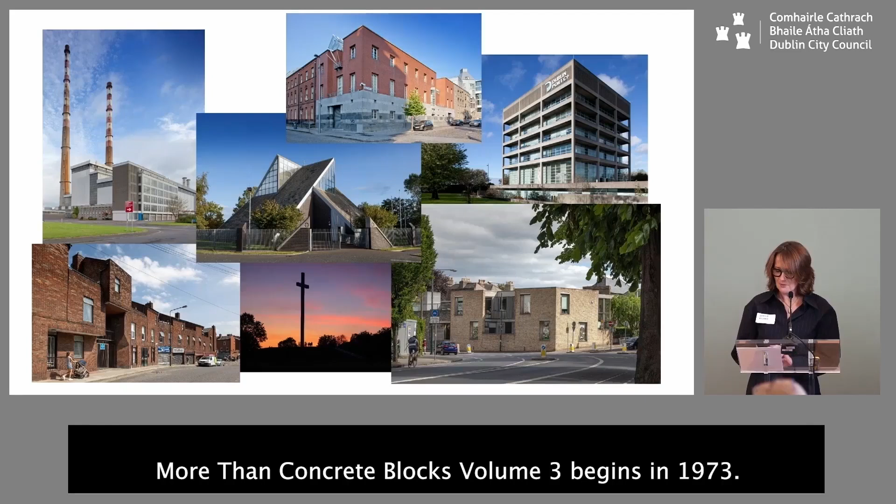More Than Concrete Blocks, Volume 3, begins in 1973. The book starts with 3 contextual essays, one for each of the decades - the 70s, 80s, and 90s - before setting the scene and allowing the reader to situate themselves in the city and imagine the conditions that gave birth to a wonderful, eclectic, and particularly Irish architecture.

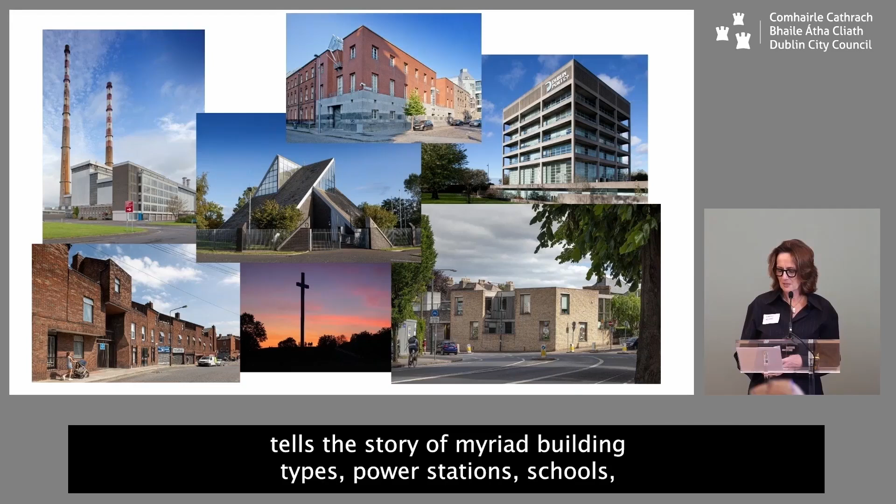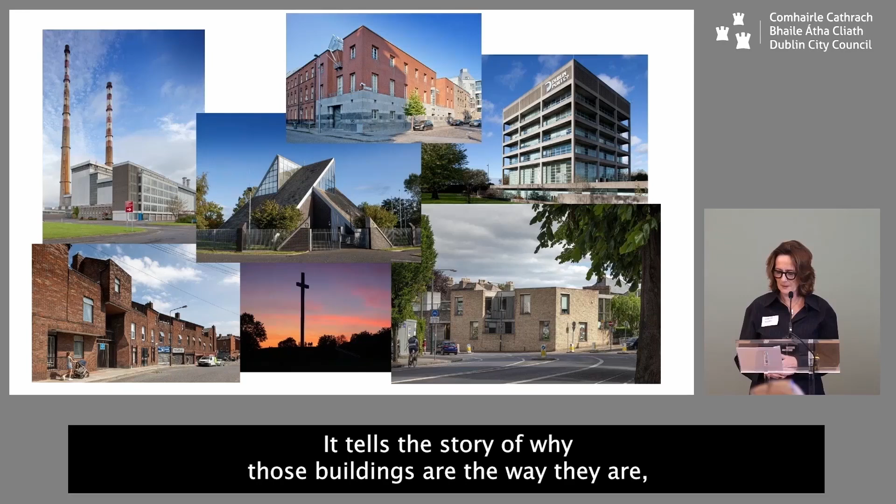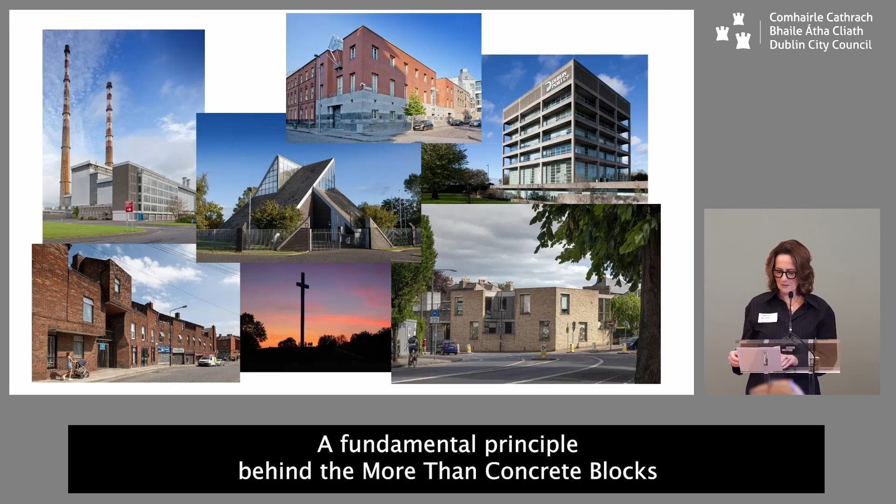That is the bread and butter of our city, the ordinary, everyday stage set of our lives. More Than Concrete Blocks tells the story of myriad building types: power stations, schools, healthcare buildings, housing, churches and courthouses, monuments and office blocks. It tells the story of why those buildings are the way they are, why they were built and by whom, and how they have served their owners and their communities in the years since they were built.

A fundamental principle behind the More Than Concrete Blocks project was the belief that knowing our building stock well, understanding its intricacies, and valuing it for what it tells us about ourselves is vital for a healthy and thriving city. Biodiversity is a word we understand and respect. We believe that cities need similar diversity - archidiversity, if you will - to remain healthy, vibrant, relevant, and sustainable. We need to pause and consider the loss of our archidiversity, particularly the significant loss of late 20th century office blocks, and imagine how our city can embrace that architecture and take it on the ride into the future.

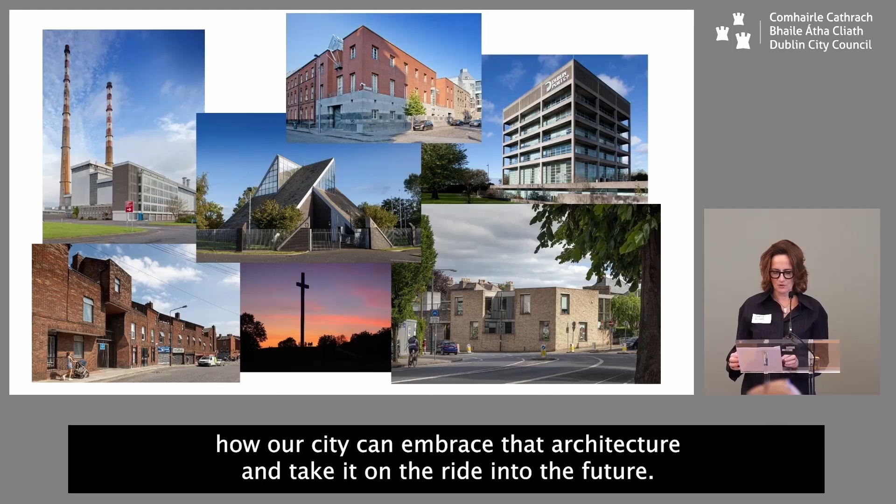In recent times, my regular cycling route has changed profoundly with the loss of 3 significant 20th century Dublin landmarks: Kevin Street College of Technology, Molyneux House, and River House. Ample evidence of the increasing incidence of loss of this particular 20th century varietal.

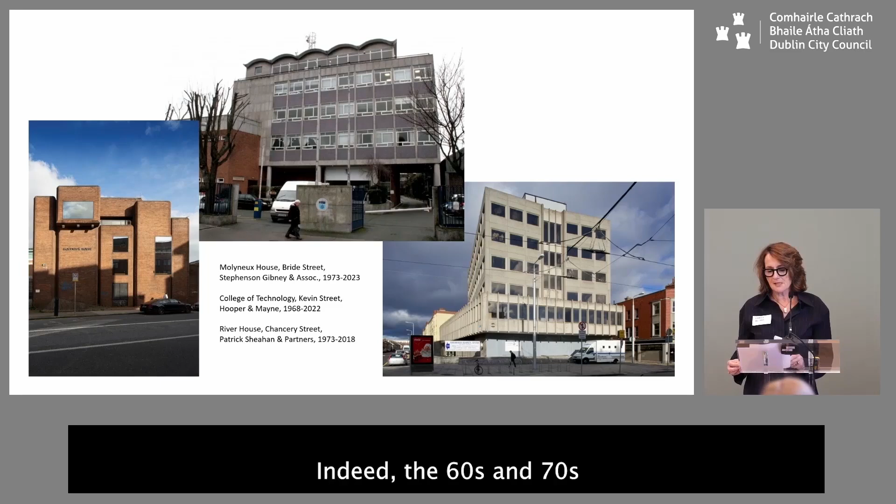Indeed, the 60s and 70s office block is a particularly vulnerable beast, with wholesale demolition occurring across the city. The scale of obliteration is feeding the debate about architectural value. What makes a building worth conserving or worthy of substantial retention by way of adaptive reuse?

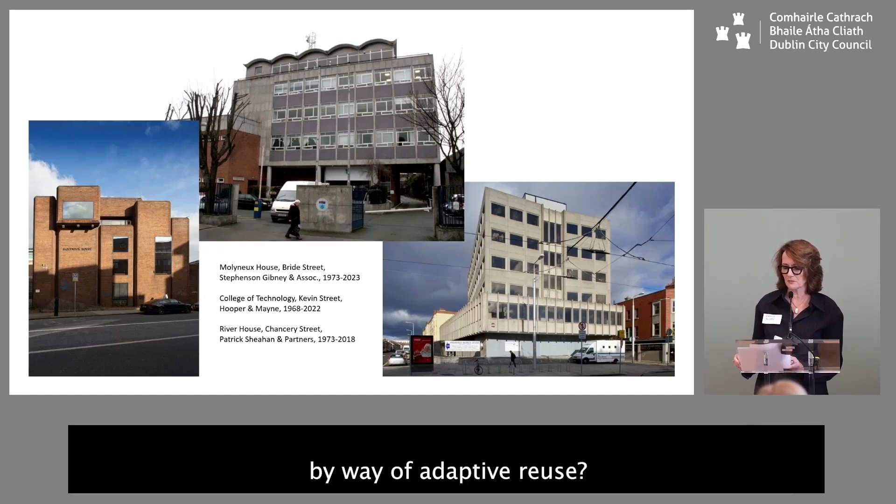Under planning legislation, local authorities are obliged to draw up a record of protected structures known as the RPS, which includes every structure which, in its opinion, is of special architectural, historical, archaeological, artistic, cultural, scientific, social, or technical interest. And I know everybody in this room is very familiar with that.

However, it is very rare to find late 20th century office blocks on the RPS. This factor, combined with the fact that 60s and 70s office blocks usually sit on very valuable city real estate, makes them particularly vulnerable to demolition.

There is no roadmap for the assessment of their value, and in any case, such assessment, if it is deemed necessary, falls to independent heritage specialists who earn their fees from the developers, whose primary objective, of course, is to derive maximum value from the building site. It makes sense then that the sites of the 70s office blocks are primary targets for redevelopment.

Nevertheless, there are a few 1970s office buildings listed on the RPS - the former Bank of Ireland headquarters on Baggot Street, now known as Miesian Plaza, being one. Its recent refurbishment by its original architect, Scott Tallon Walker, is an obvious exemplar to boost the position of planning authorities regarding refusing permission to demolish in favour of refurbishment.

The successful, albeit costly, refurbishment at Baggot Street can show the way for developers to see the value in such upgrades. Gains must be measured not just in terms of financial return, but in the longer-term environmental benefits of sustainable development and, of course, the preservation of our archidiversity.

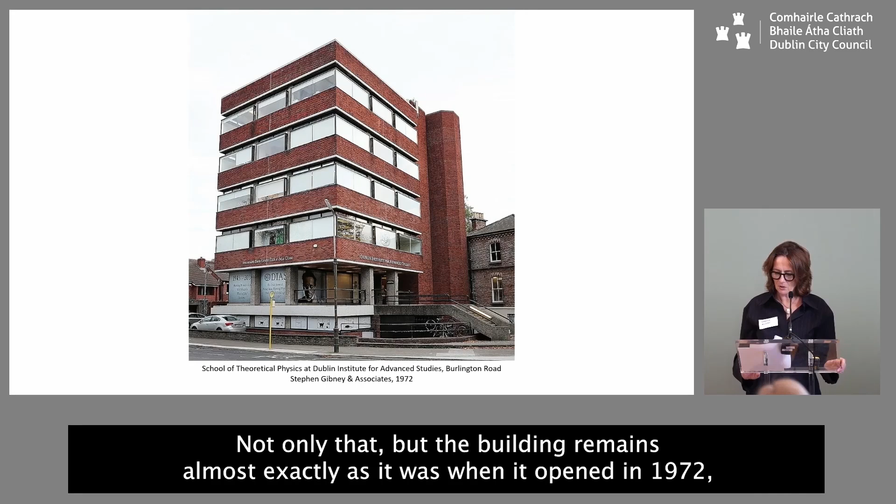Another lesser-known office building on the RPS is the School of Theoretical Physics at the Dublin Institute for Advanced Studies on Burlington Road, designed by Stephen Gibney and Associates. Despite many lucrative offers from developers to purchase the site, the DIAS, who is the owner-occupier, has held firm. Not only that, but the building remains almost exactly as it was when it opened in 1972, complete with original furniture, library shelves, light fittings, and the most precious fixtures of all - the blackboards.

The former New Ireland Assurance Company offices on Dawson Street is another example of an office building on the RPS, currently undergoing refurbishment and extension while retaining substantially its original form. The building is in fact an amalgam of three buildings: a 1934 office building on Dawson Lane by Vincent Kelly, a 1964 office building on the corner of Dawson Street and Dawson Lane by Morris and McCullough, and a 1971 building on Dawson Street by Patrick Campbell.

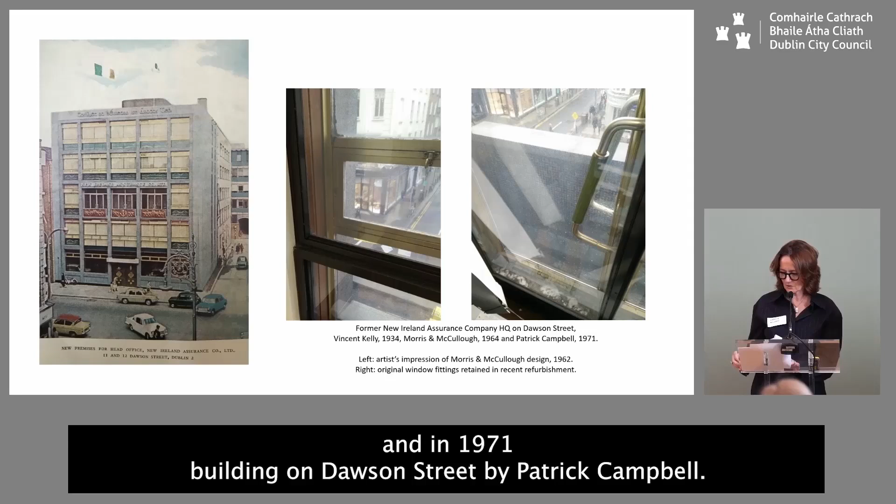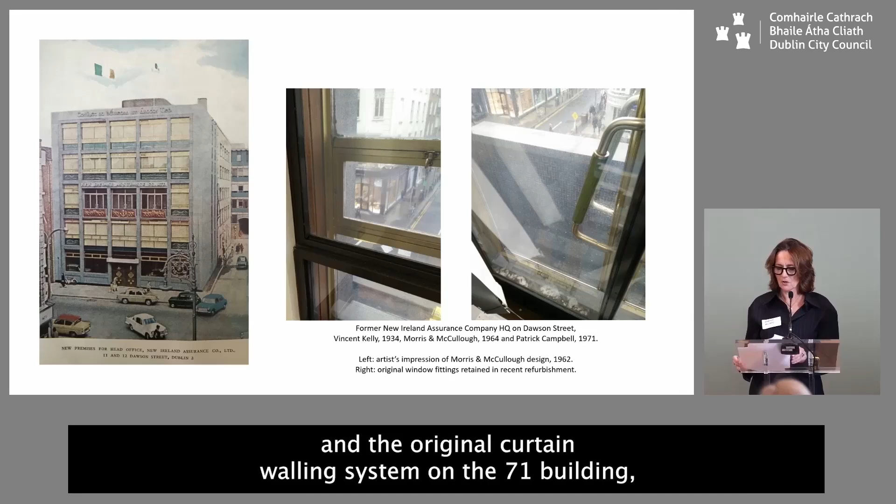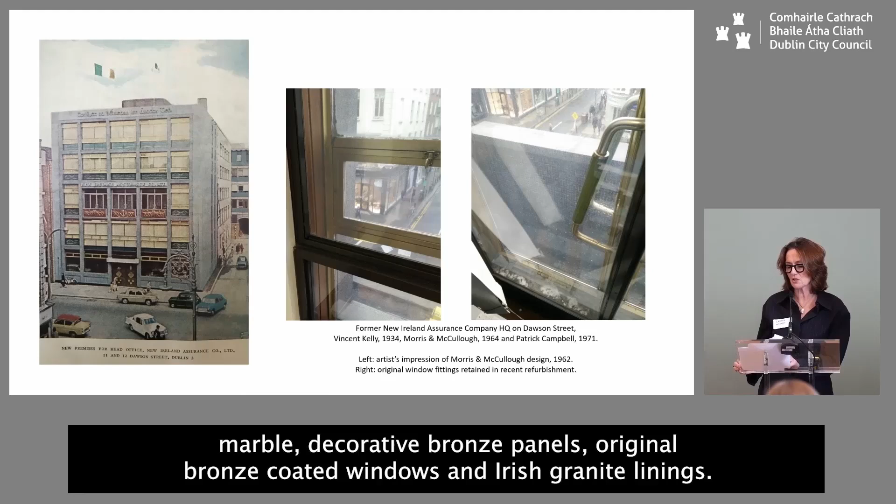The current refurbishment works, which are nearing completion, include the retention of the concrete structure and facades, and the original curtain walling system on the '71 building. They also include many of the building's unique and important details, including Connemara marble, decorative bronze panels, original bronze-coated windows, and Irish granite linings. Planners granted permission for additional floors set back behind the parapet, showing compromise can reap benefits for all.

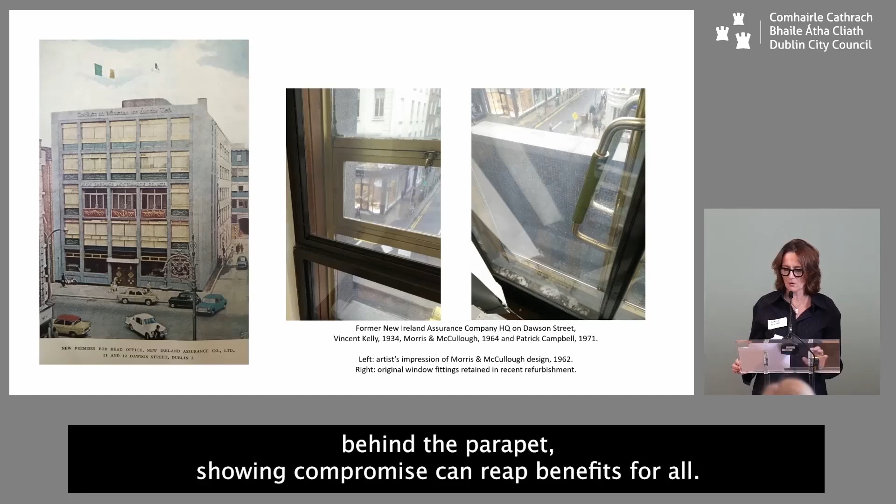In the context of the pervasive threat to Dublin's 1970s office blocks, these three projects represent gains, each in a different way. Unfortunately, though, the survival of office buildings like these, the gains, are greatly outnumbered by the losses.

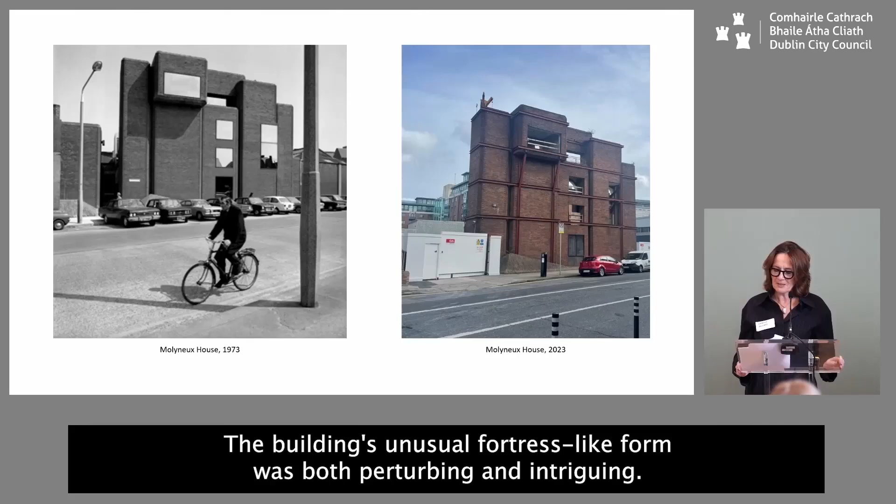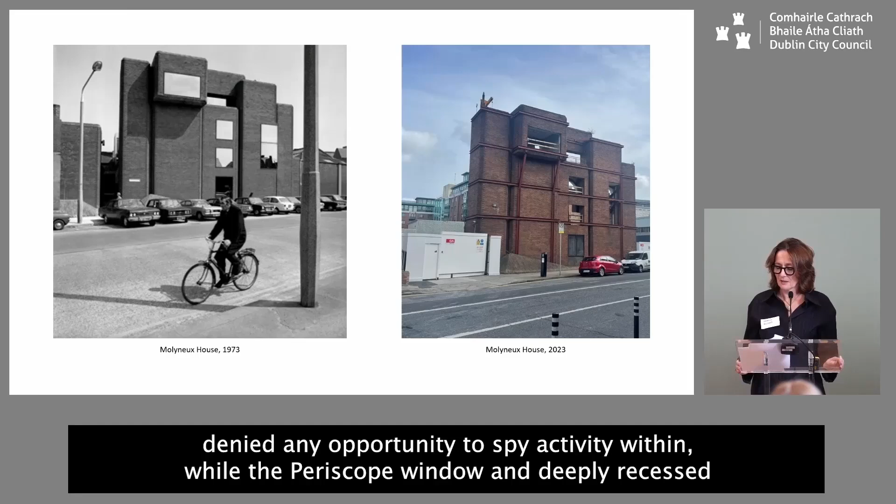Until earlier this year, the facade of Molyneux House remained one of the most distinctive in the city. The building's unusual fortress-like form was both perturbing and intriguing. Reflective glass in the windows, now gone, denied any opportunity to spy activity within, while the periscope window and deeply recessed balcony on the fourth floor suggested covert surveillance of the street below.

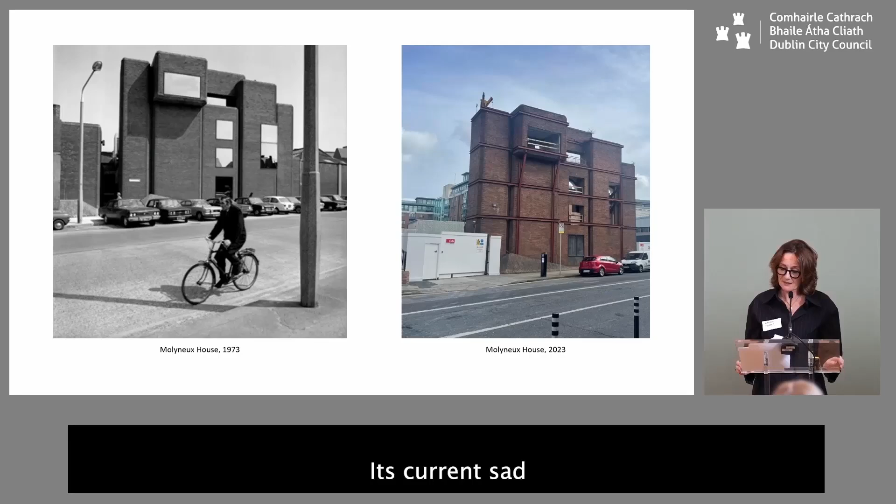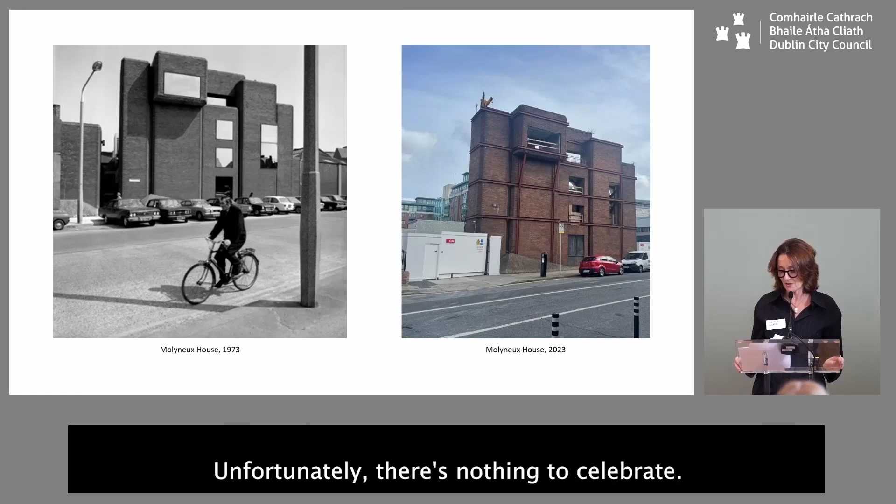In its current sad state, it is all the more distressing for the fact that Molyneux House is celebrating its 50th birthday this year. Unfortunately, there's nothing to celebrate. All that remains is the skeletal outer layer of its remarkable facade.

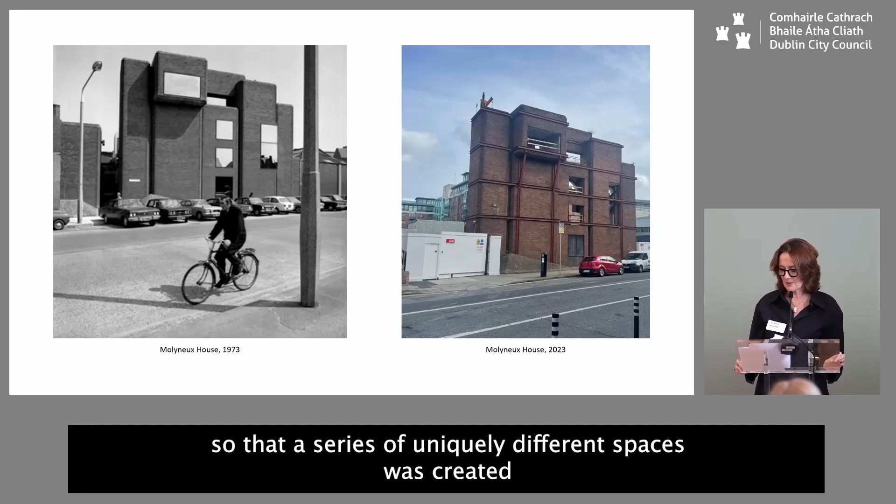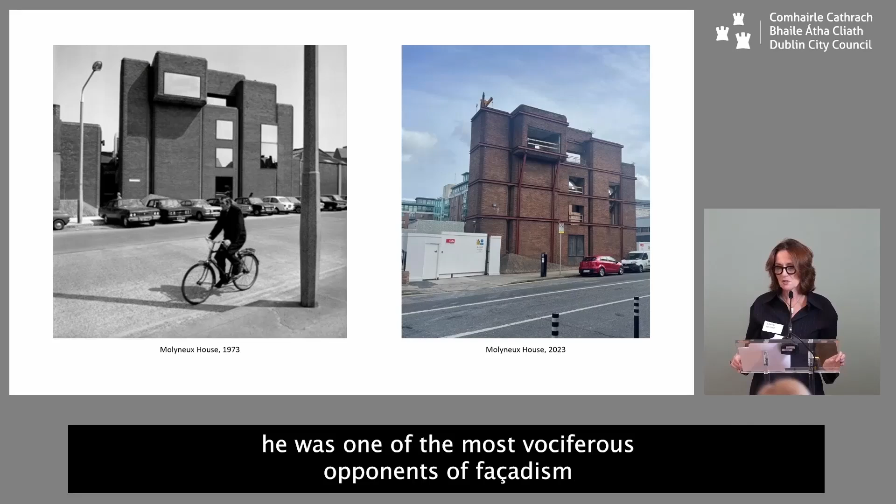In designing that facade, Stephenson purposely retained the front wall of the original 19th century Molyneux Chapel, constructing an outer layer that broke forward from the old in an irregular manner, so that a series of uniquely different spaces was created between the old and the new skins. By retaining the outer brick layer only, now in 2023, Stephenson's ingenious gesture is completely lost. A tragic irony, considering he was one of the most vociferous opponents of facadism in the 1970s and 80s.

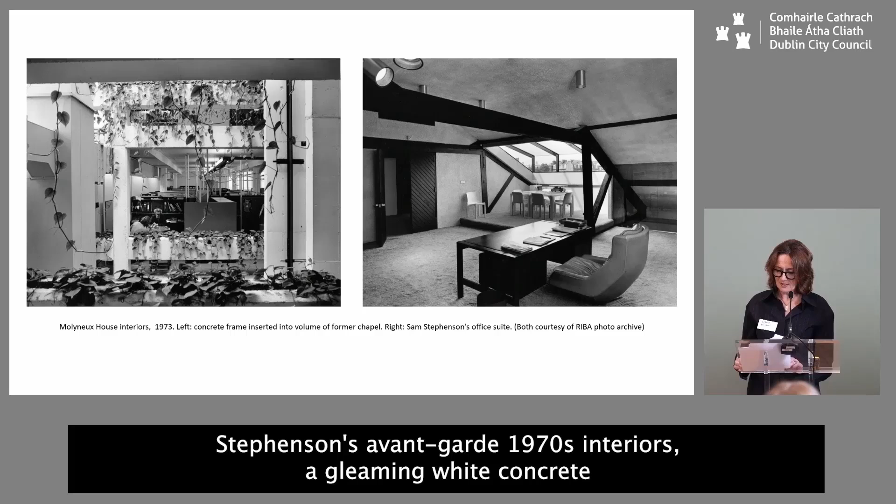What has been lost at Molyneux House is significant and regrettable, but it began long before the wrecking balls came in 2023. Stephenson's avant-garde 1970s interiors, a gleaming white concrete frame inserted into the volume of the former church, with open-plan offices, a glass lift, an open staircase, trailing plants, and his own bespoke suite on the upper floor were gradually lost during the 1980s and 1990s. When a building is not on the record of protected structures, its interiors are particularly vulnerable to loss.

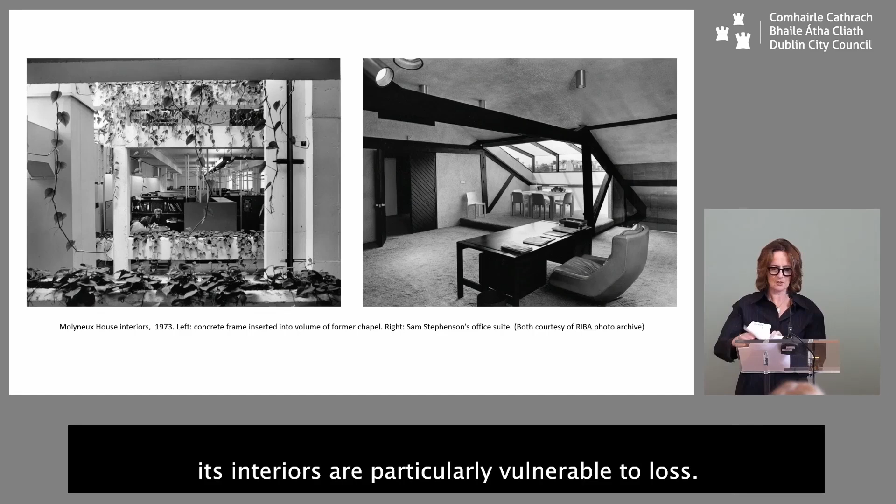AIB Bank Centre in Ballsbridge was not on the record of protected structures when permission to demolish the complex was granted in 2017. Bank Centre was designed and built as Ireland's first corporate campus, an American typology that became increasingly popular in Europe in the 1960s. The original scheme, designed by Andy Devane, comprised 15 pavilions arranged in a symmetrical composition, 9 of which were built. In 2018, when demolition began, the pavilions were in excellent condition, internally and externally.

They were nevertheless perceived by their developer to be redundant, worthless artifacts of an earlier age, and because there was no official measurement of value, there was nothing the planning authorities could do to prevent redevelopment. Devane's masterpiece, and I do not think it's an overstatement to call it that, was demolished and replaced with a new scheme called Fibonacci Square.

The scheme's developers chose the name because, they alleged, the renowned architect Andy Devane, designer of the AIB campus, was inspired by the Fibonacci sequence, as was his mentor, Frank Lloyd Wright. Having studied Devane's work for a number of years now, including his time under the tutelage of Frank Lloyd Wright, I have never come across a reference to Fibonacci in their work. A strange and obscure gesture in the circumstances.

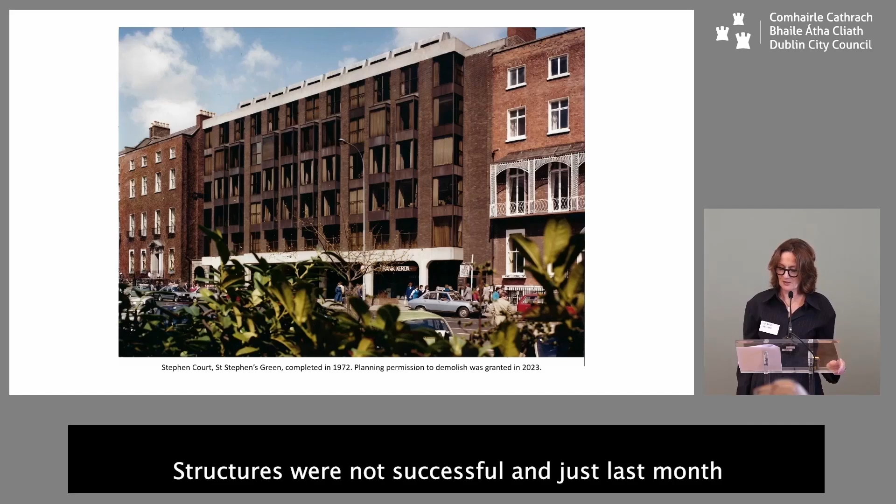Devane, one of the century's most prolific architects, designed only 3 office schemes in Dublin: AIB Bank Centre, the Irish Life Centre, and Stephen Court. Efforts to get Stephen Court listed on the record of protected structures were not successful. And just last month, an appeal to An Bord Pleanála was withdrawn, paving the way for its imminent demolition.

In the many submissions to the Planning Authority arguing against the demolition of Stephen Court, observers quite rightly pointed out that demolishing an office building to rebuild an office building was an outrageous proposal in 2022, given the climate emergency and the role and impact construction is playing on the climate crisis.

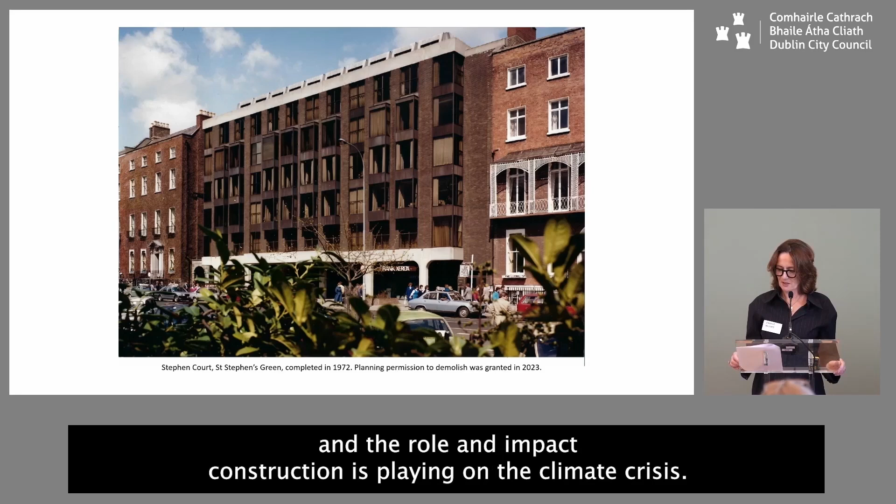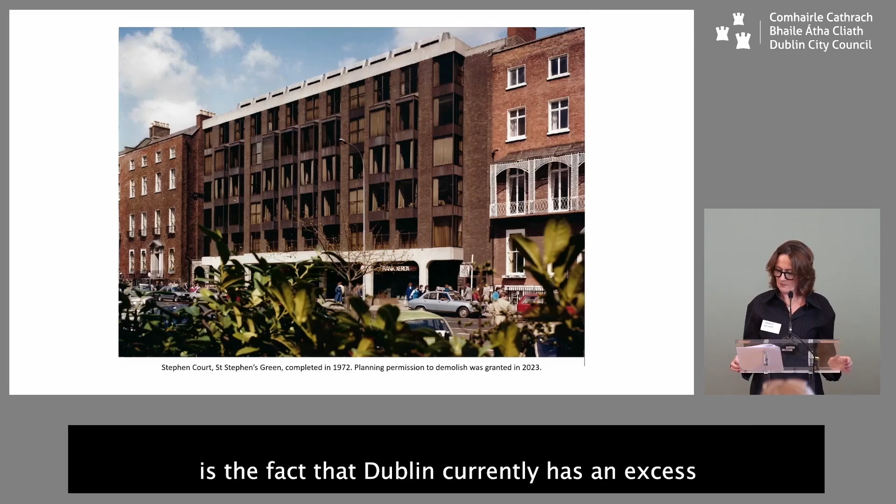This argument needs to gain more momentum. In the meantime, the only thing that may put a stay on the demolition of Stephen Court, long enough for its demolition to be reconsidered at least, is the fact that Dublin currently has an excess availability of office space.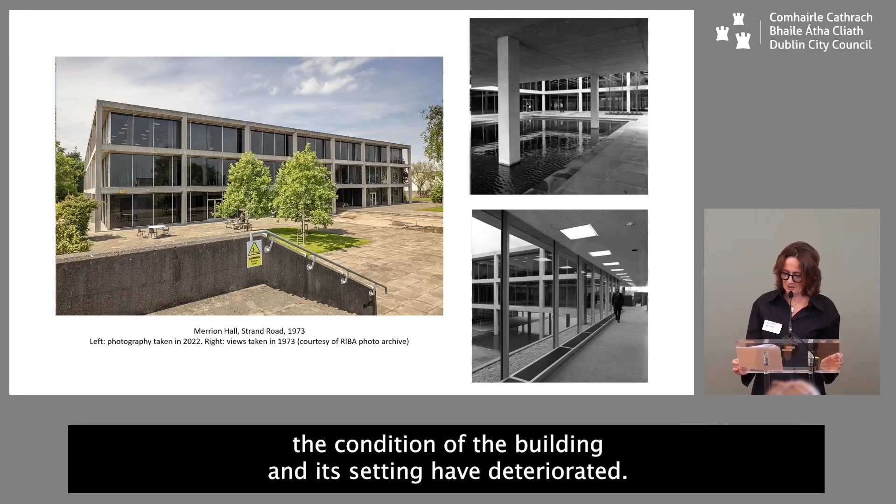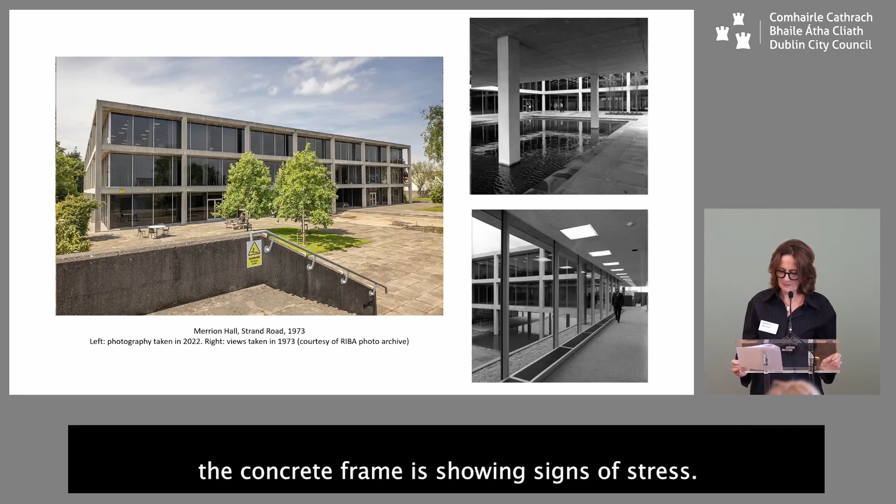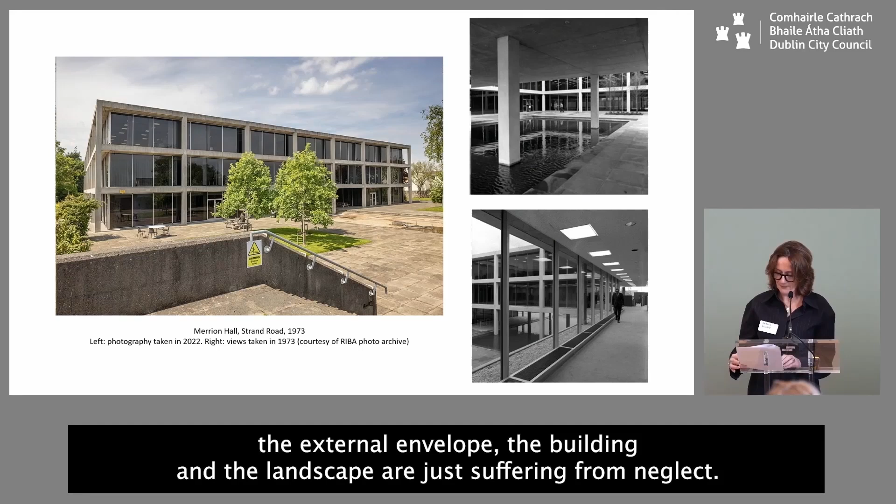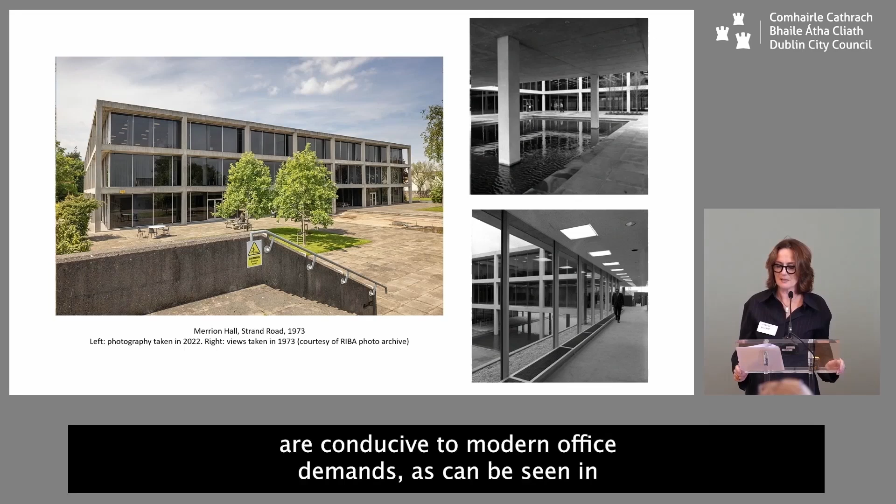The proportions of the office spaces are conducive to modern office demands, as can be seen in the interior photographs taken shortly after its completion. It is one of the most enduring Irish office blocks of its age.

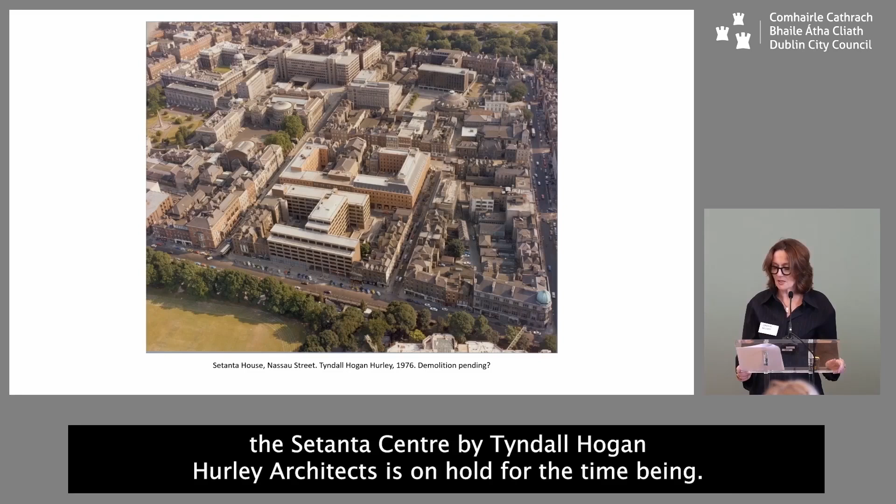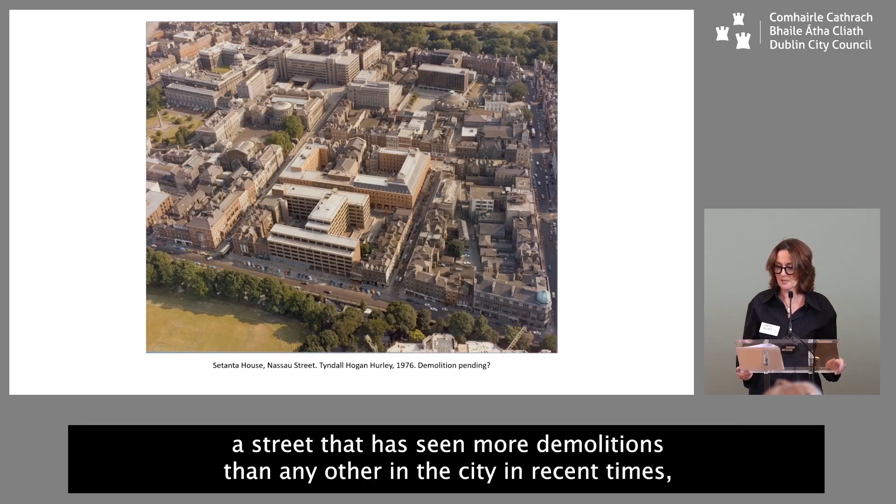Demolition of the Setanta Centre by Tyndall Hogan Hurley Architects is on hold for the time being. The decision not to proceed is not based on architectural or environmental considerations, but it is the result of a legal dispute between the developer and existing tenants. This photograph clearly shows the proximity of the Setanta Centre to Molesworth Street, a street that has seen more demolitions than any other in the city in recent times, and that phenomenon has spread into neighbouring Dawson Street and Nassau Street.

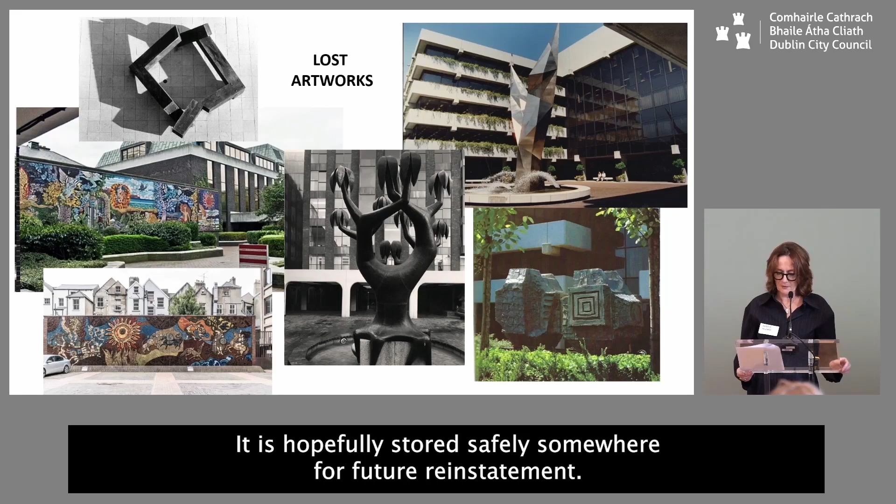While the fate of Setanta House is being decided, the famous 1970 Táin Wall, created by artist Desmond Kinney, was taken down. It is hopefully stored safely somewhere for future reinstatement. You can see it there on the bottom left. The same cannot be guaranteed for Kinney's other great 1987 mural, known as Sweeney Astray, shown middle left. According to one source, the mural was ripped off the wall of the Abbey Court Garden in the Irish Life Centre and packed into black plastic bags.

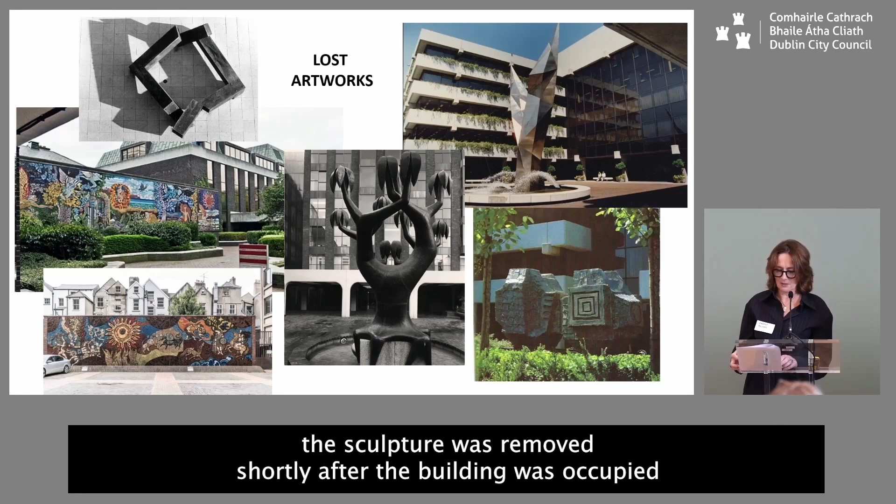Top left is an image of Michael Warren's timber sculpture, Noce Obscura, commissioned by architect Niall Scott for the Port and Docks headquarters on Alexandra Road. Intended to be viewed from the office floors above, as it is in this photograph, the sculpture was removed shortly after the building was occupied, and its whereabouts are unknown.

In the centre is a photograph of Imogen Stuart's Tree of Life, cast in copper, which stood in the internal courtyard of Stephen Court. It was one of a pair of Stuart sculptures commissioned by Devan. The other, the Tree of Knowledge, was cast in concrete. Both were removed in the 1980s, and their whereabouts are unknown. At bottom right is a photograph of John Behan's stone carvings known as Megalithic Monuments, which stood in the landscape gardens at AIB Bank Centre. The whereabouts of this artwork and others commissioned by Devan for AIB, including work by Desmond Kinney, Alexandra Wejchert and Anne Price Owens, are unknown.

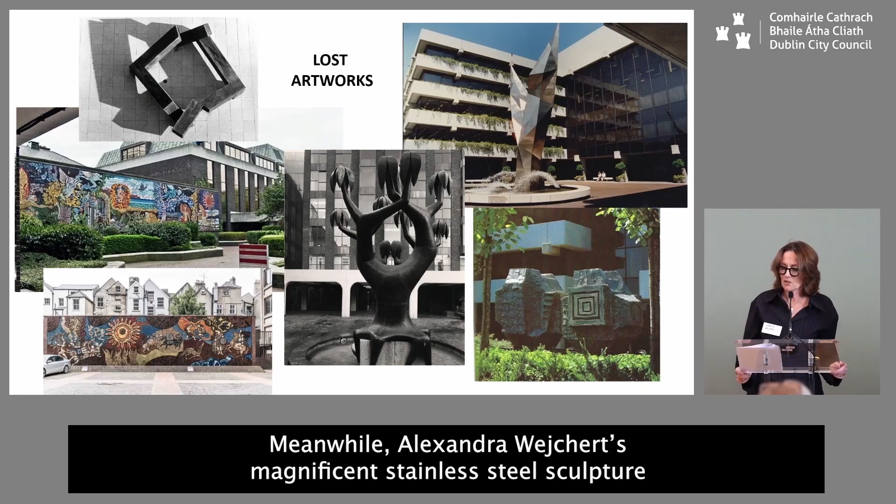Meanwhile, Alexandra Wejchert's magnificent stainless steel sculpture Freedom, shown on top right, was removed when Bank Centre was demolished and has been relocated to Maynooth University, I believe.

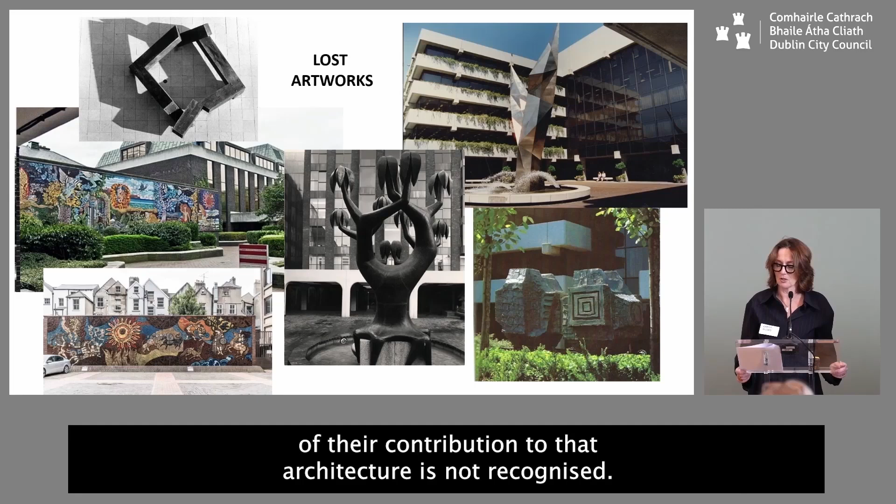Artworks were very much an integral part of 1970s architecture, but their value and the importance of their contribution to that architecture is not recognised. Like the buildings for which they were specially designed, they have no protection. Their vulnerability is exacerbated by the fact that the removal is not considered demolition and therefore does not require planning permission.

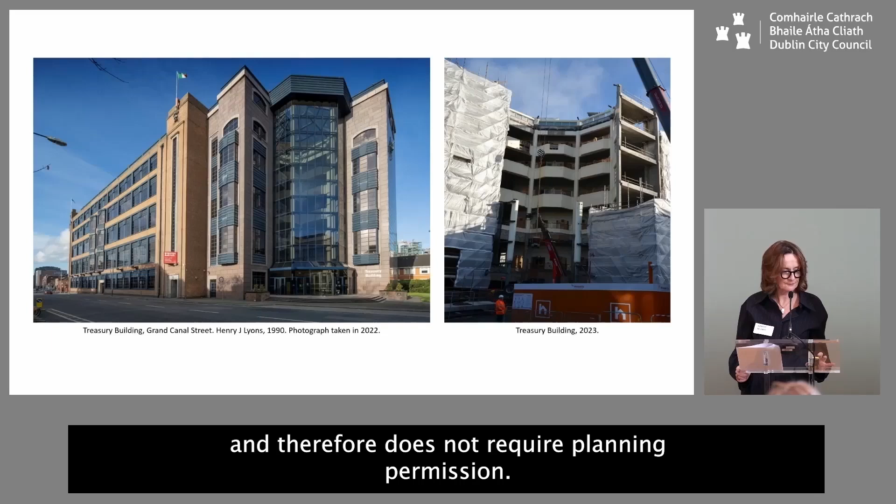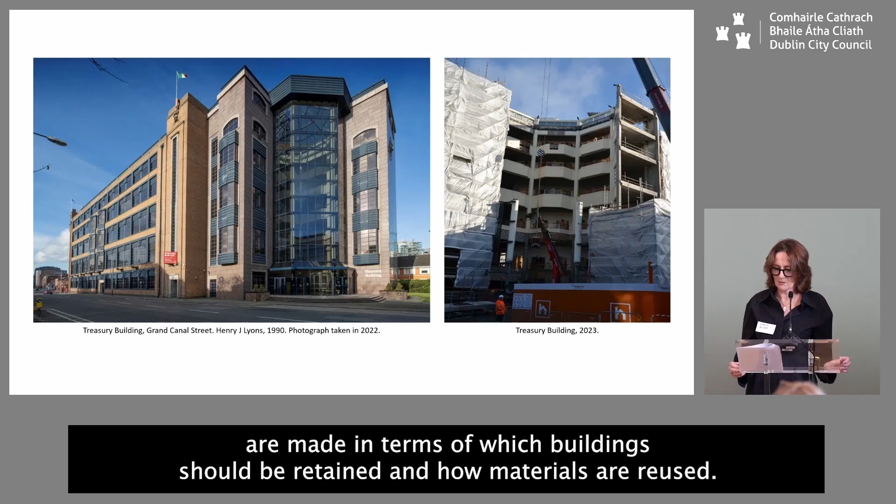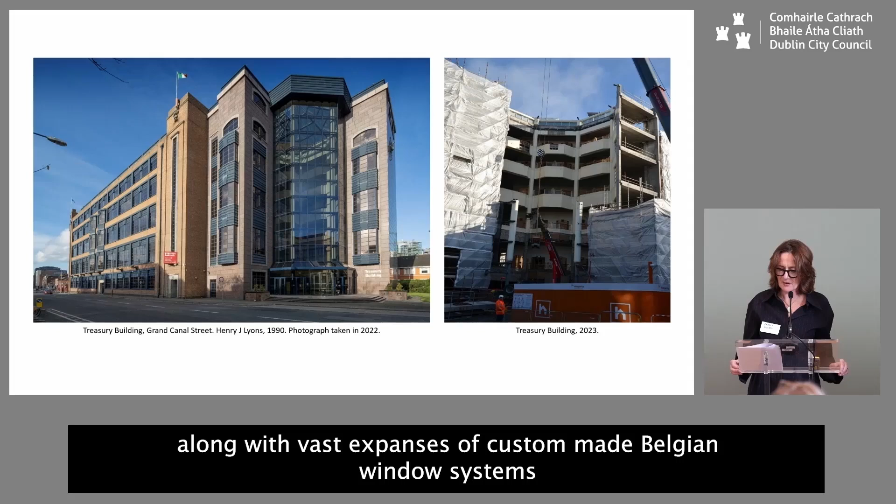Demolitions are continuing elsewhere in the city too, and while few will lament the loss of Hawkins House and others in that particular city block, the iterative dismantling and dumping of so many thousands of cubic metres of viable building materials must call into question how value assessments are made in terms of which buildings should be retained and how materials are reused. In the past few weeks, six stories of Italian and Norwegian marble, along with vast expanses of custom-made Belgian window systems, have been stripped off Treasury Building on Grand Canal Street.

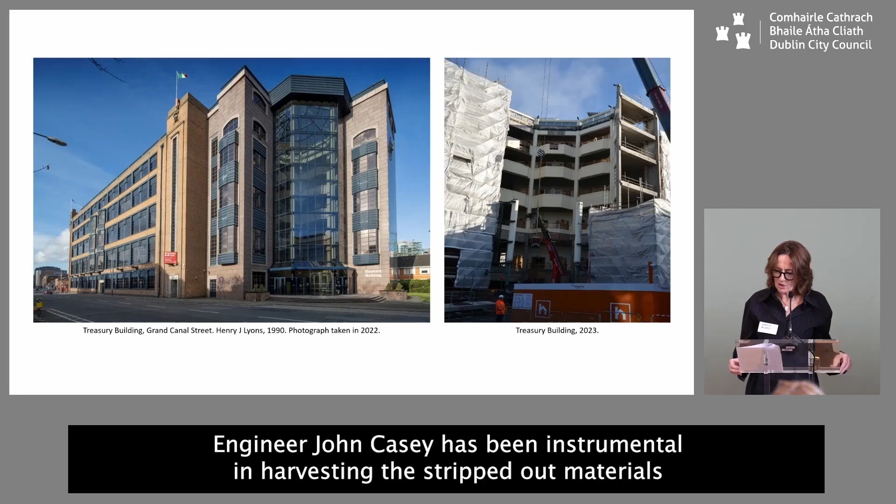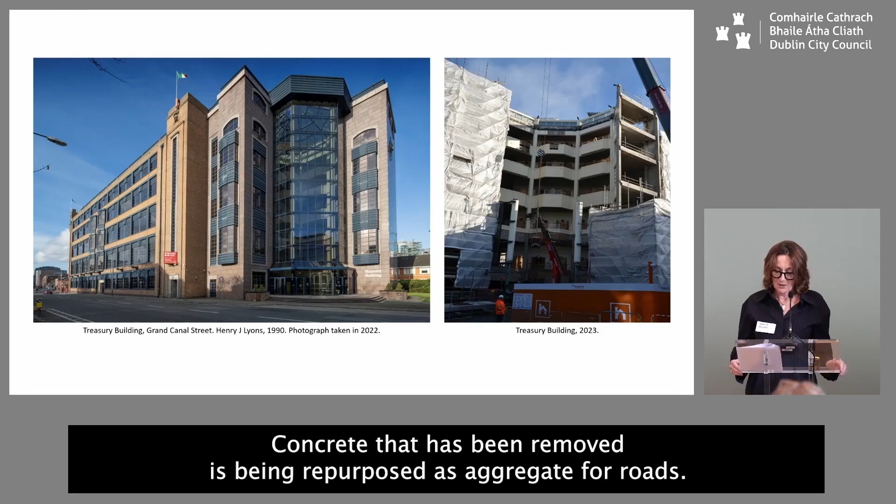There are little sparks of hope, though. Engineer John Casey has been instrumental in harvesting the stripped-out materials and in repurposing materials such as steelwork from the atrium in new parts of the building. Concrete that has been removed is being repurposed as aggregate for roads. But all that pink marble, specially selected by the developer in the 1980s, is available free to anyone who would like to take it away.

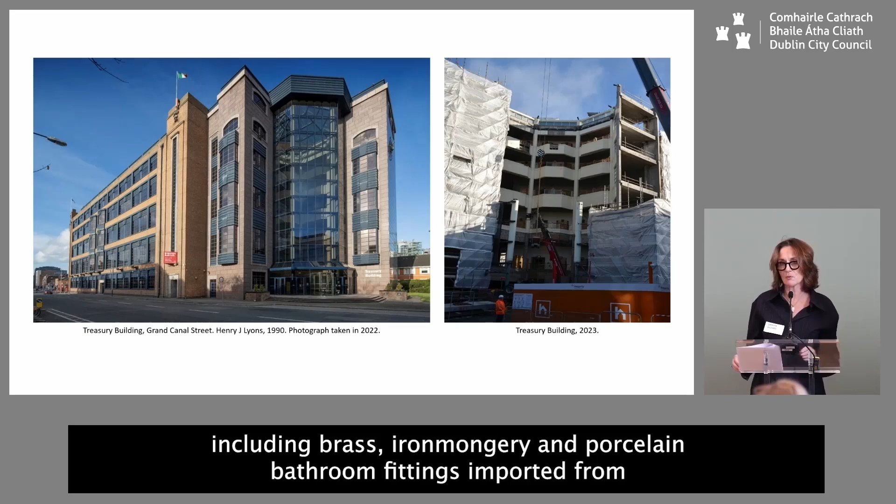If you are interested, you can check out the Irish Green Building Council website. No doubt other expensive bespoke interior fittings, including brass ironmongery and porcelain bathroom fittings imported from the United States, have been relegated to the dumpster.

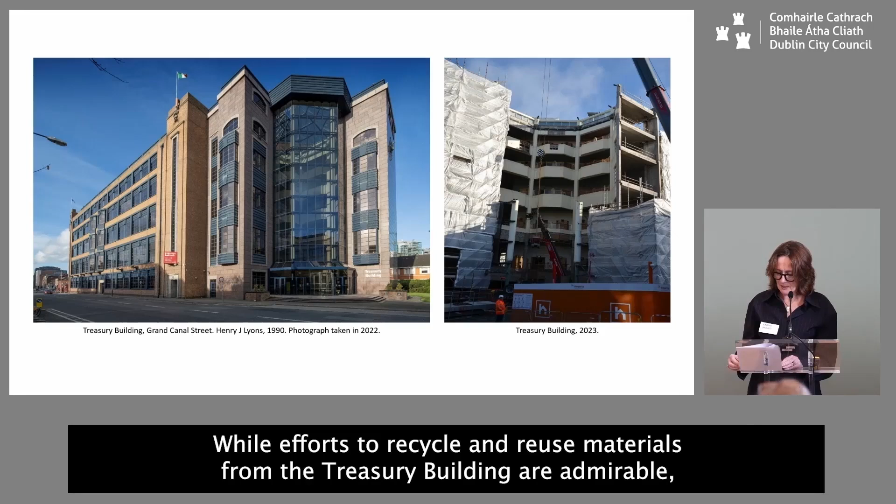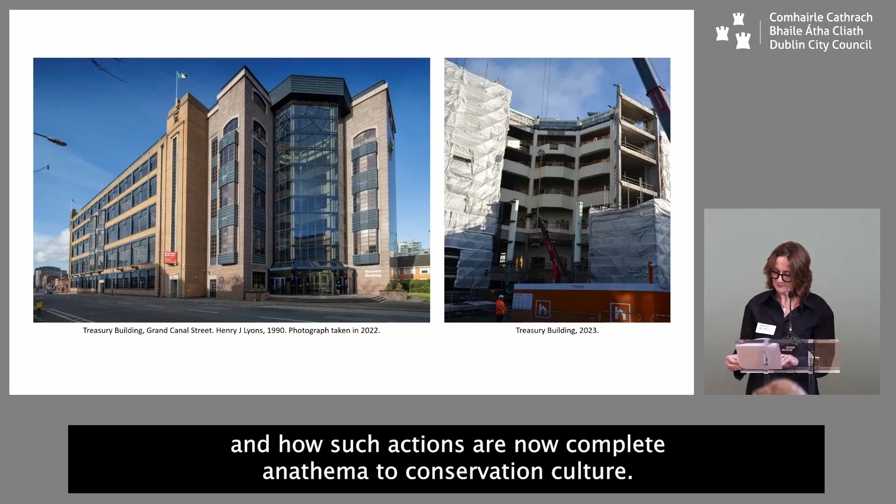And remember, this building was only completed in 1990. While efforts to recycle and reuse materials from the Treasury building are admirable, one cannot help drawing comparison with the removal of chimney breasts and the stripping of roof slates from historic buildings, and how such actions are now complete anathema to conservation culture. The groundbreaking work of John Casey and his team is important nonetheless, and it would be great if he could be commissioned by the Department of Heritage or the Department of Environment to report on the outcome of his efforts at Treasury Building.

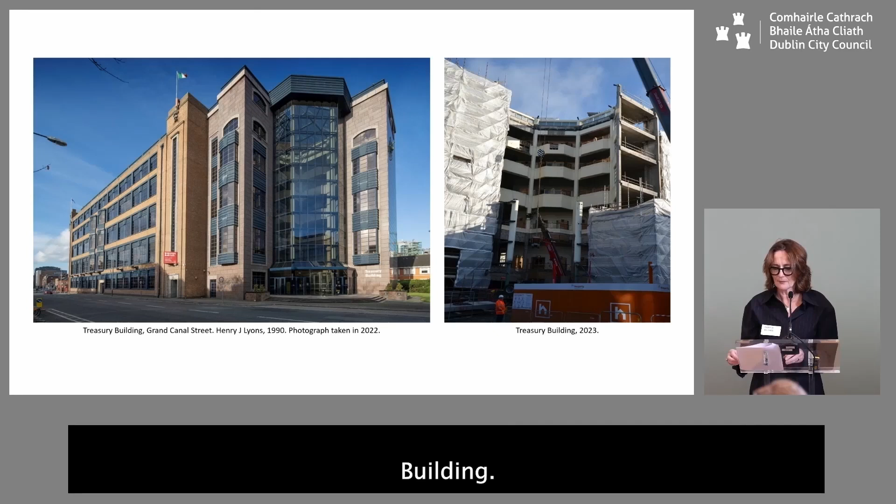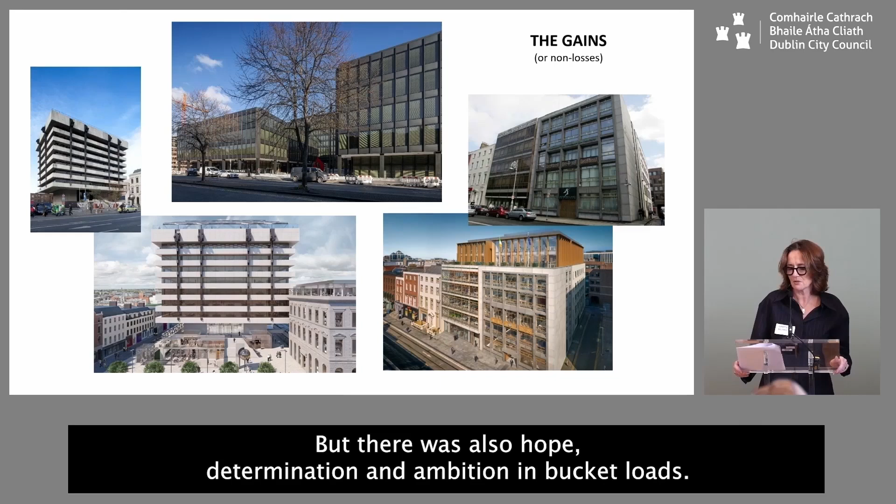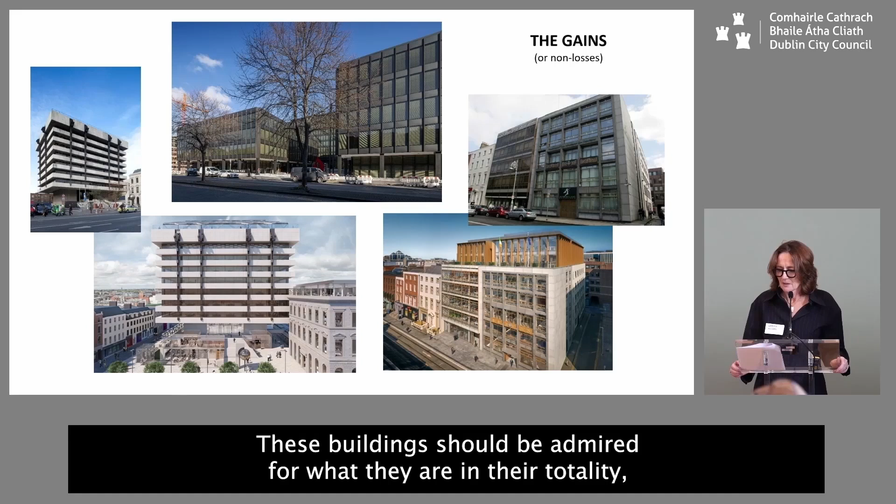1970s office buildings are troublesome, yes. There was inappropriate development, yes. There was poor quality construction, yes. But there was also hope, determination, and ambition in bucket loads. The decades of the 1960s and 1970s epitomise Ireland's concerted effort to declare itself an independent state. These buildings should be admired for what they are in their totality, not simply dismissed as irrelevant artefacts.

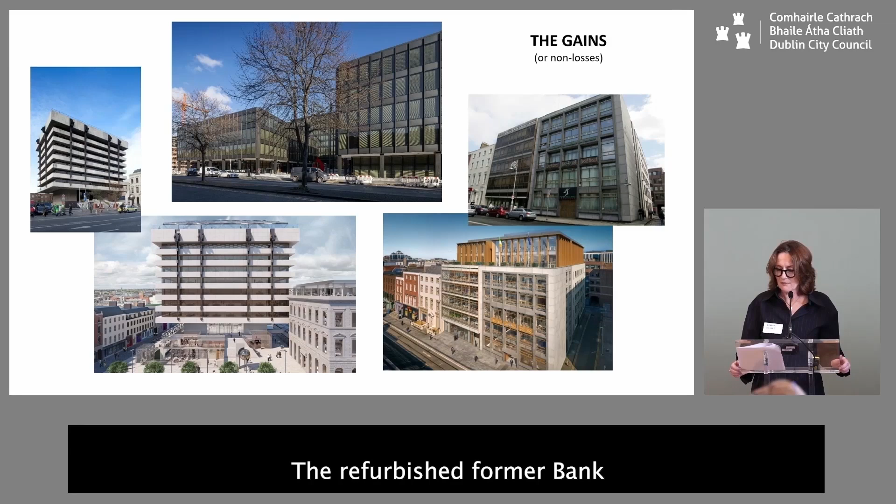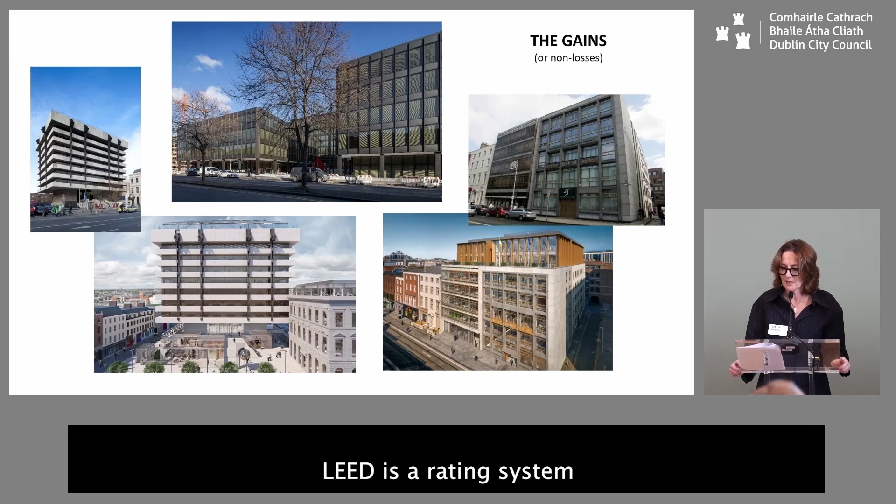The refurbished former Bank of Ireland headquarters on Baggot Street is one of the few listed buildings in Ireland to achieve Leadership in Energy and Environmental Design, LEED. LEED is a rating system devised by the United States Green Building Council. It measures the environmental performance and sustainability of buildings and goes above and beyond Irish regulatory standards in energy efficiency. I look forward to Ronan Phelan's presentation this afternoon.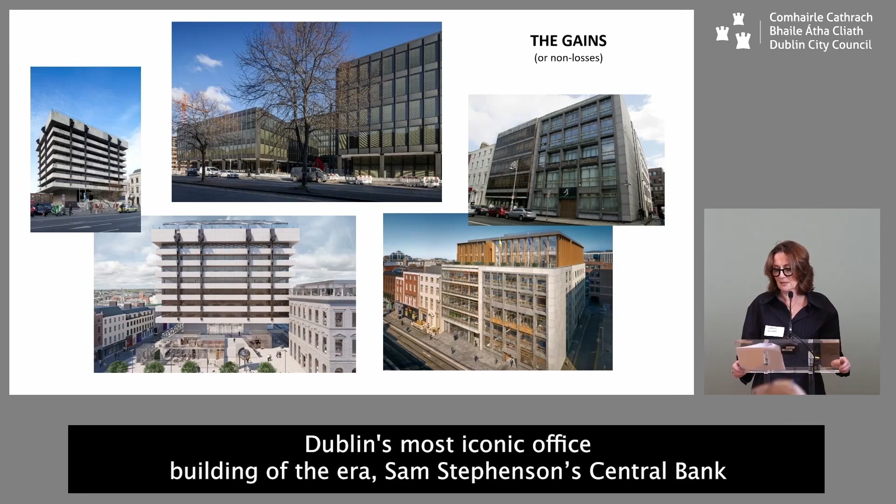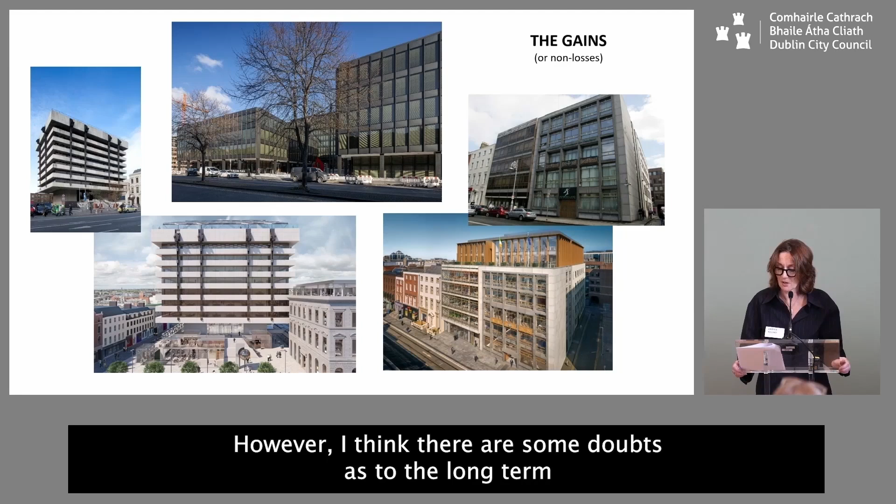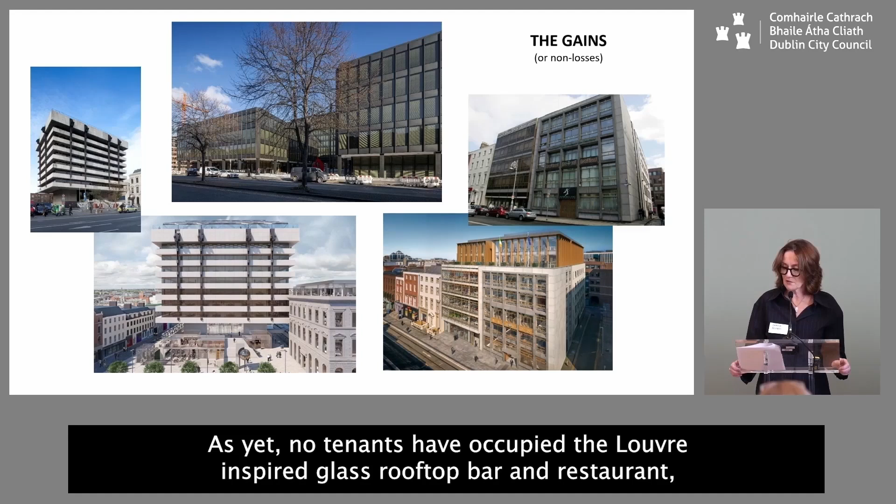Dublin's most iconic office building of the era, Sam Stephenson's Central Bank, reimagined as Central Plaza. However, I think there are some doubts as to the long-term success of the decision to sink one of Dublin's few south-facing plazas. As yet, no tenants have occupied the Louvre-inspired glass rooftop bar and restaurant, but we are hopeful that the developers will hold the promise of making the building, particularly that roof space, accessible to the general public. Brendan Ward will tell us more later today.

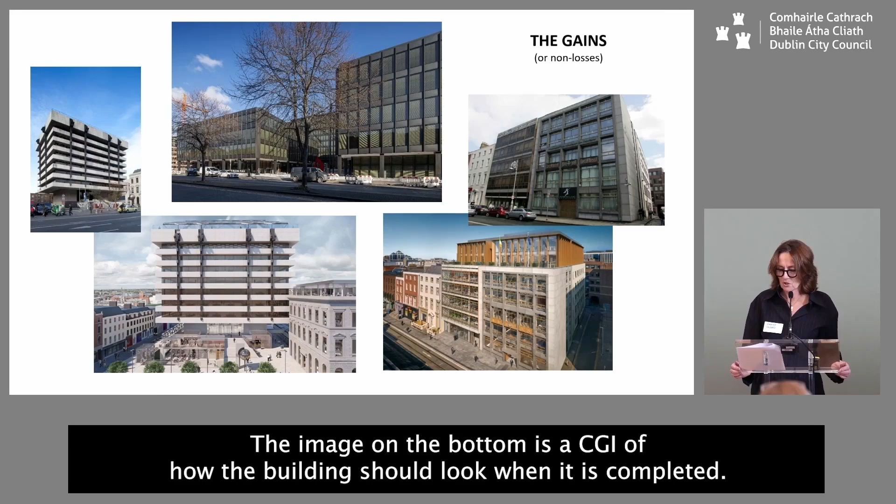The success of the refurbishment of the former New Ireland Assurance Company headquarters is still to be revealed. The image on the bottom is a CGI of how the building should look when it is completed. Pascal Mahoney will talk about this afternoon also.

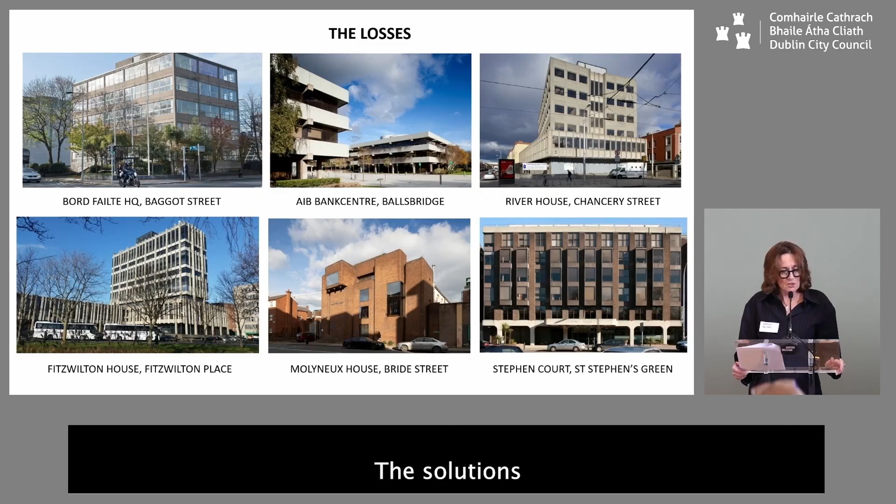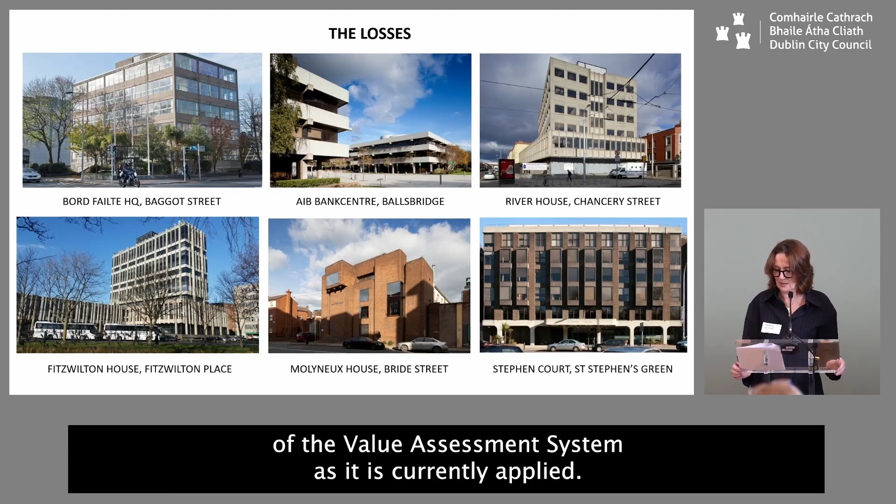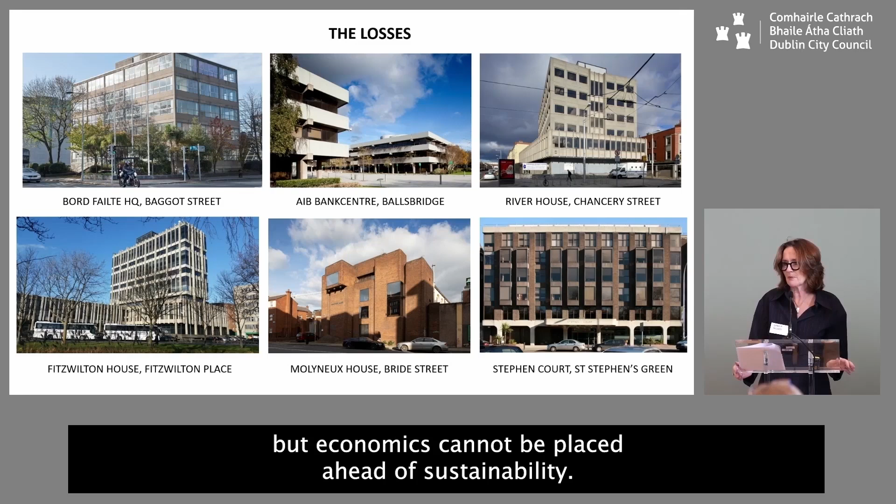The solutions for 20th century office buildings are not simple. The greatest hindrance to survivability is the inadequacy of the value system, assessment system as it is currently applied. It is right that Dublin City Council should have economic progress and prosperity for all citizens at the heart of its decision-making processes, but economics cannot be placed ahead of sustainability. It is estimated that 37% of carbon emissions in Ireland stem from the construction and built environment sector.

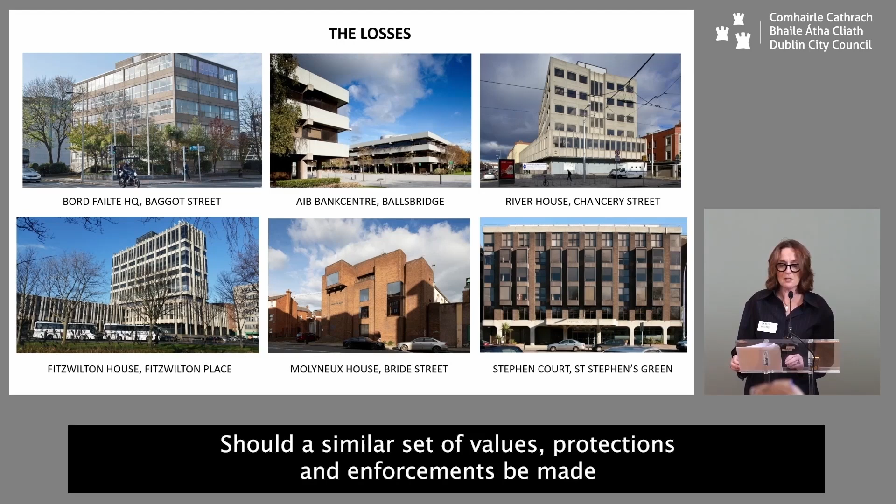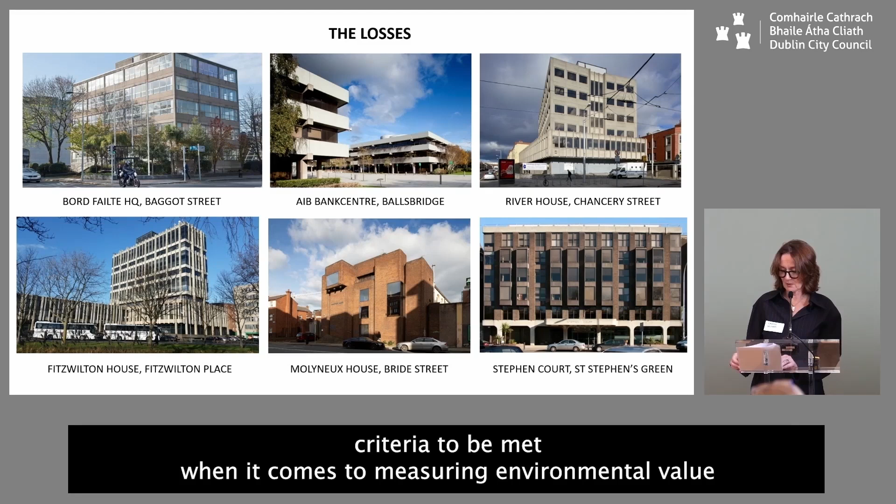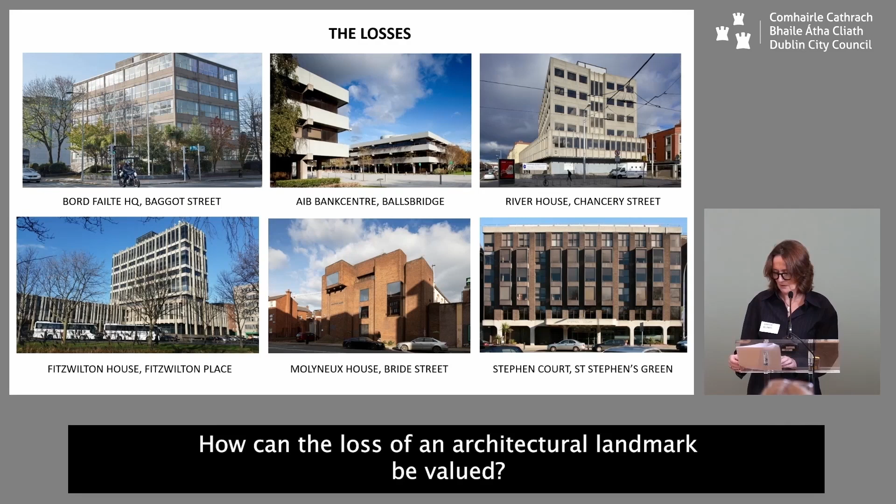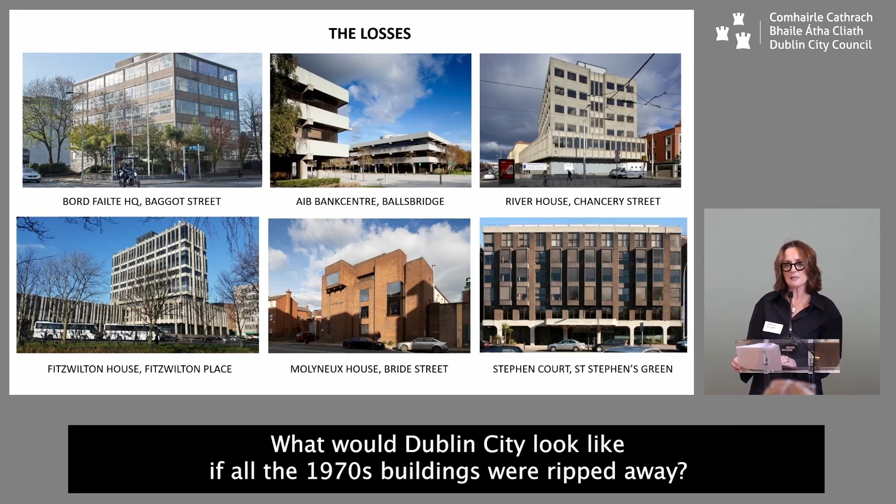The record of protected structures has a discrete set of values by which buildings are assessed for value, and then protections are applied and enforced. Should a similar set of values, protections and enforcements be made when a planning application is received to demolish a viable building? What are the criteria to be met when it comes to measuring environmental value that is so inextricably linked with cultural value? How can the loss of an architectural landmark be valued? What is the place of 20th century office buildings in our national psyche, now and in the future? What would Dublin City look like if all the 1970s buildings were ripped away? And what would future generations have to say about such an architectural chasm?

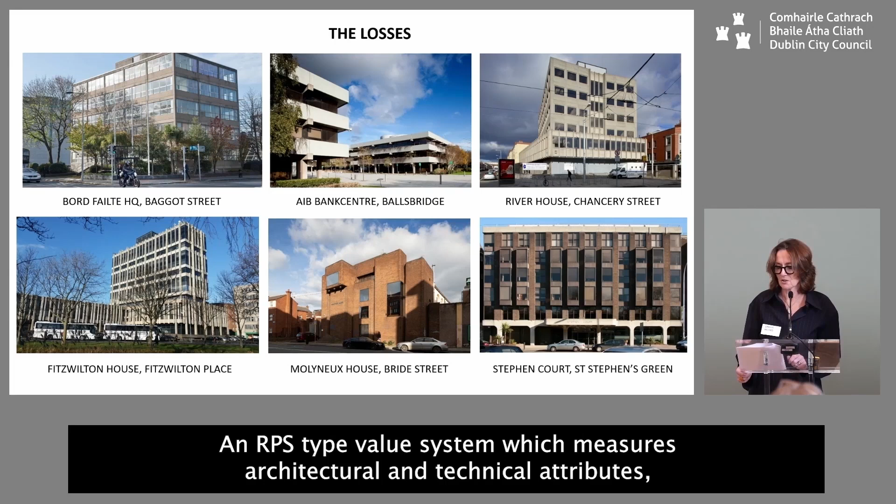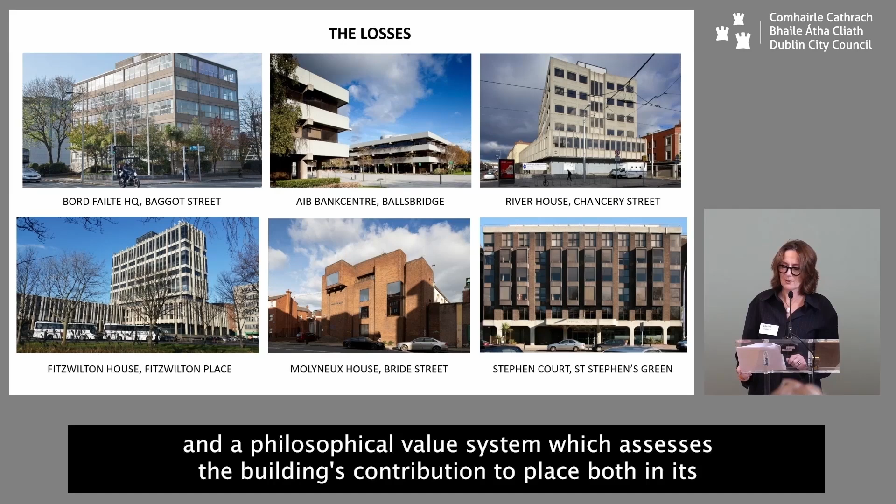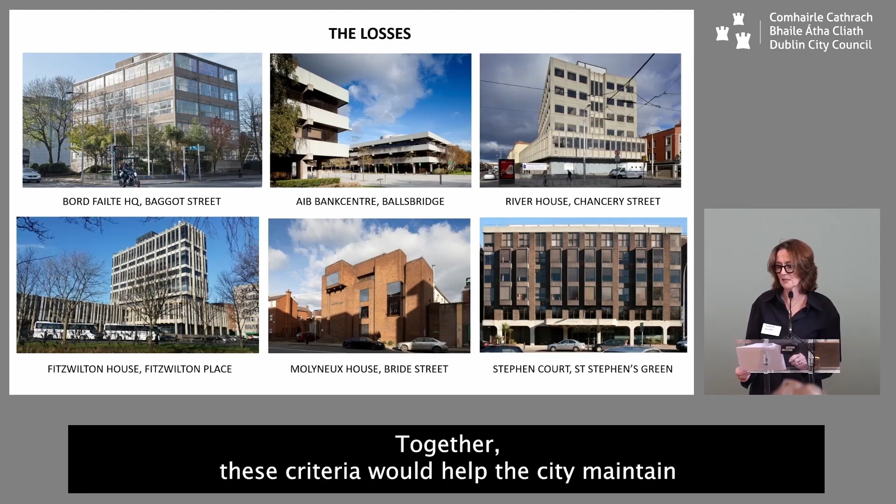There are at least 3 interlinked value systems that should be applied to making decisions about the future of existing late 20th century building stock. An RPS-type value system which measures architectural and technical attributes, a sustainability value system which considers environmental impact, and a philosophical value system which assesses the building's contribution to place, both in its immediate physical context and in the context of its contribution to the city's evolution. Together, these criteria would help the city maintain and sustain a healthy archidiversity.

Only last month, journalist David McWilliams described Dublin's office market as having 3 categories: the Georgian Victorian era, which is an incredible 187 years long, the crony era between the 1960s and 1990s, and the globalization era from 2000 onwards. McWilliams' populist assertion that the so-called crony era offices were built by men in mohair suits and were largely the result of sweetheart deals between politically connected developers and their friends in government denies the much, much deeper and richer legacy of these buildings, their architects, and all those that made them.

We have to look beyond commentary like this. I believe that we are now at an adequate distance to cast a critical and knowledgeable eye over the architecture of the closing decades of the century, particularly the vulnerable buildings of the 60s and 70s. They say 50 is a dangerous age for a building, and the evidence is all around us.

Let's pause and consider the legacy of these buildings in terms of their value to Dublin's future. Let's recognise them for what they really are: a collection of complex organisms that sustain the city and its citizens, a precious and vulnerable element of Dublin's archidiversity. We do not want more than concrete blocks to become a book of obituaries. Thank you.